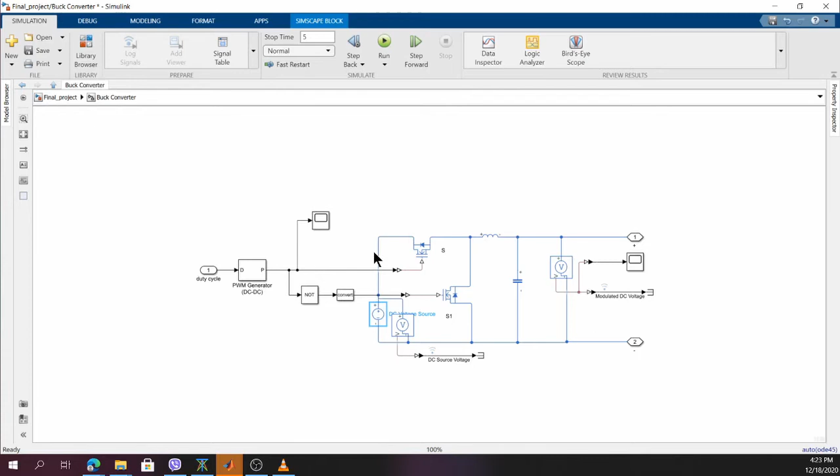This different DC voltage level is then fed to the three-phase converter, and the three-phase converter will work according to this. My name is Rasin Mohammad Ihtemam, ID 1706117.

The three-phase inverter takes DC voltage input from the buck converter and energizes the required phases of the brushless DC motor stator. Which phases to energize, the three-phase inverter takes this command from the commutation logic.

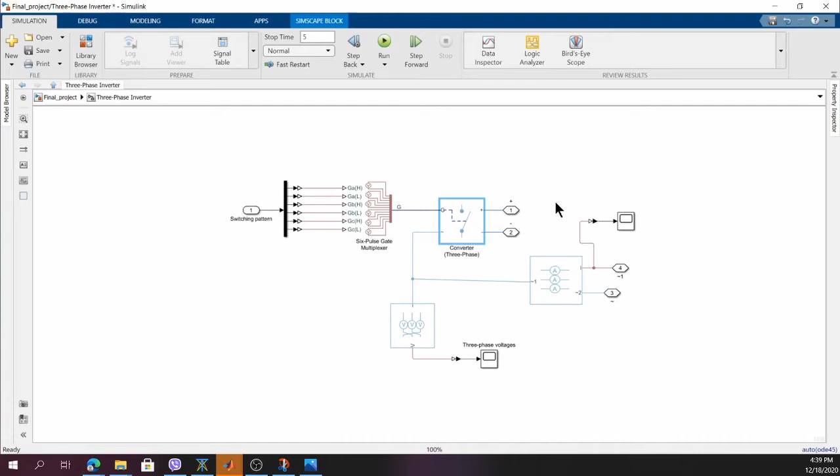In this block we can see that the switching pattern from the commutation logic is fed to the three-phase inverter, and DC supply is fed from the buck converter. Then the three-phase inverter energizes the phases accordingly.

For example, when the rotor of the BLDC is between phases B and C, and the rotor north pole is between phases B and C, the sensor block senses this position of the north pole and gives command to the commutation logic, which gives command to the three-phase inverter, so that the B phase is energized such that there is a north pole, and C phase has a south pole.

The A phase does not have any electrical energy at that moment, and as a result the north pole of the rotor comes close to the C phase. When it crosses over the C phase, the B phase is cut off from the supply by the three-phase inverter, and the inverter energizes A such that there is a magnetic south pole, and C has a magnetic north pole.

For this reason the north pole of the rotor tries to reach the A phase, and thus the three-phase inverter gives DC voltage to the required phases of the three-phase BLDC.

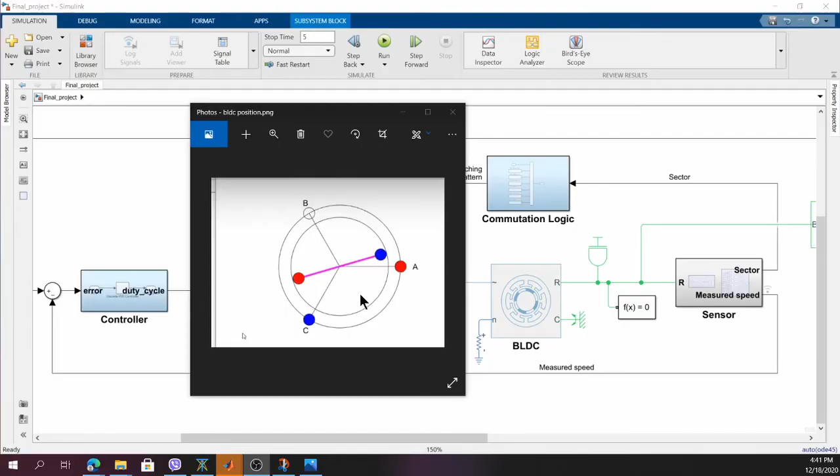There are 6 cases in our commutation logic. Note that each time only one of the outputs will be positive and the rest will be 0. For example, when the rotor is between 0 to 60 degrees, the sensor will command the commutation logic to activate switching pattern 1, and the other patterns will not be activated. In switching pattern 1, only A and C phases will be activated.

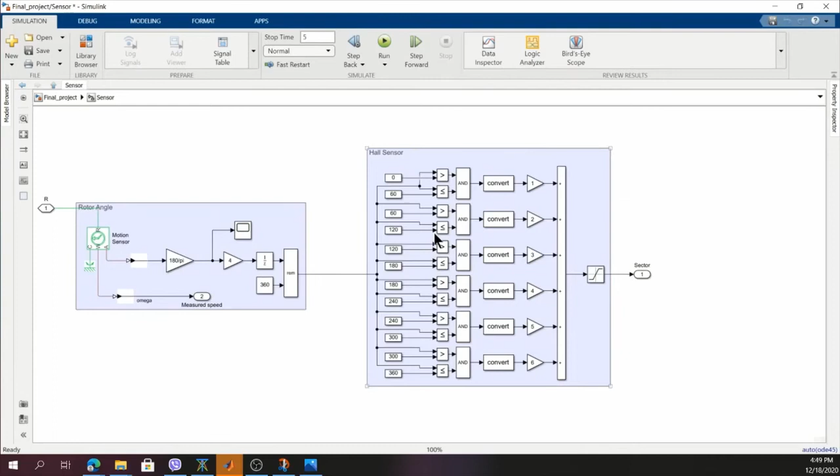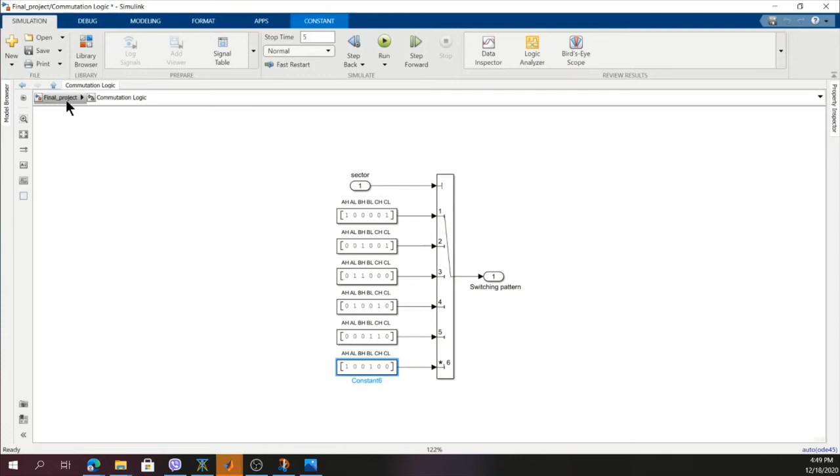When the rotor is between 60 to 120 degrees, the commutation logic will activate pattern 2, and according to our logic, the A phase will be cut off here and the B and C phases will be activated, and vice versa. Thus they work together to give the exact switching pattern or command to the inverter. The sensor here is named the Hall effect sensor.

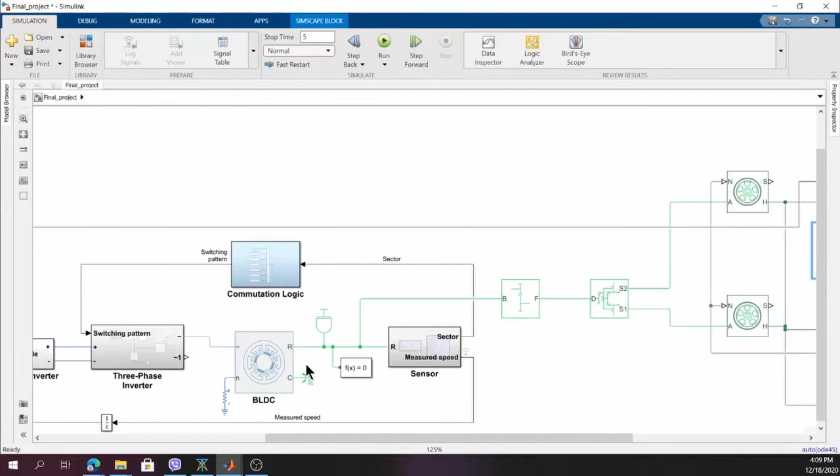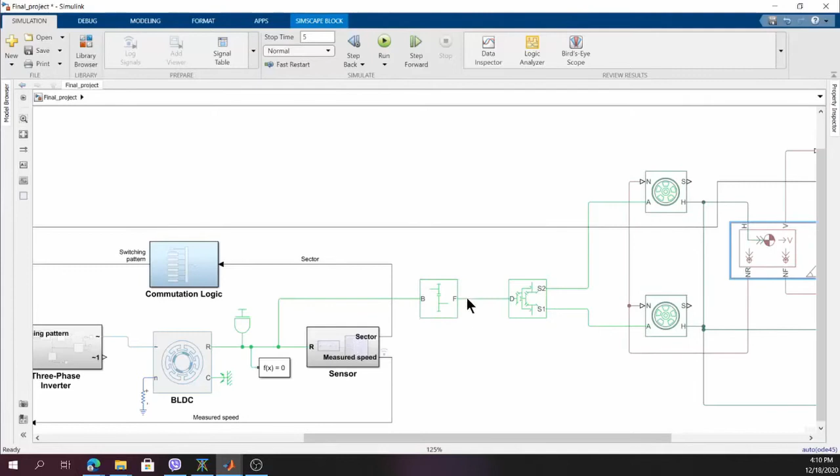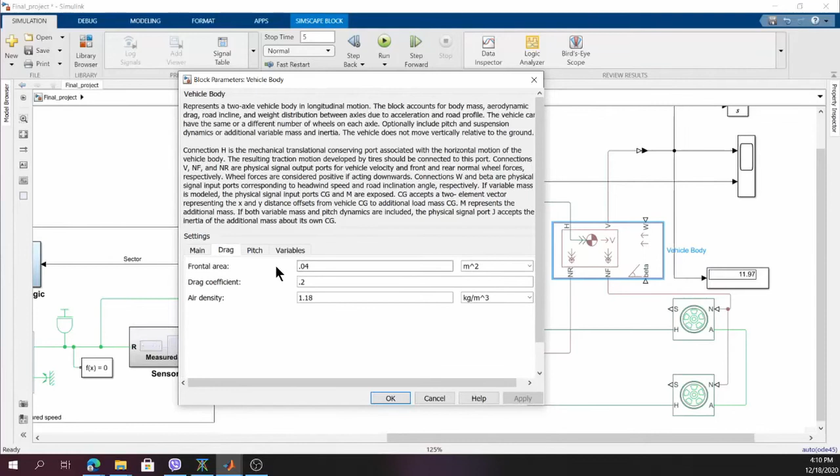Now here is the vehicle body where rear tires and front tires are connected. In the vehicle body we see some different parameters, and we can choose values like mass of the vehicle 30 kg, frontal area 0.04, drag coefficient 0.2, and air density 1.18 kg per meter cube.

On the output side, we can measure the vehicle velocity along with the input velocity that we are controlling, its acceleration and brake, which is simulated by a slider.

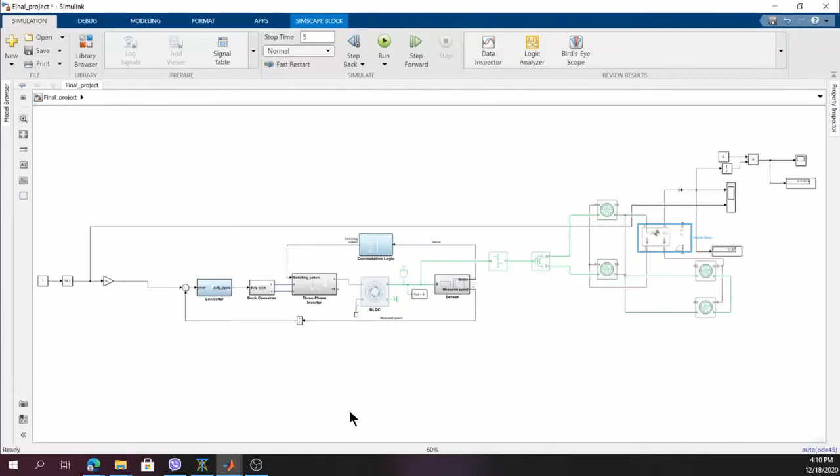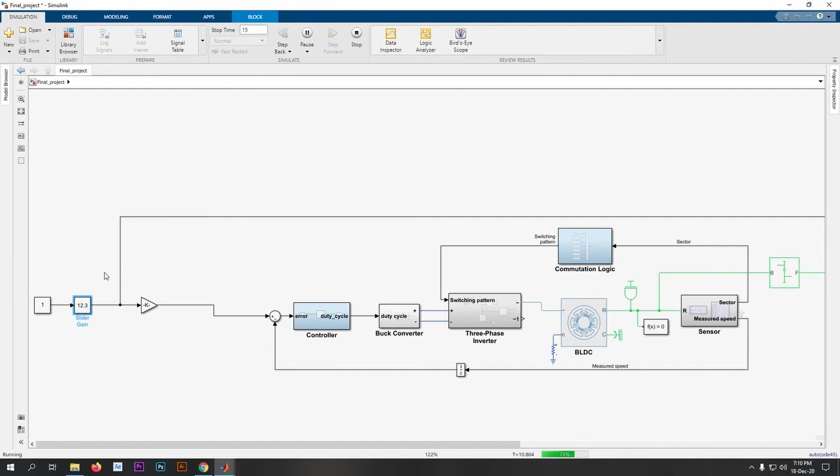Okay, it's time to check the output of our model. Let's just run our model. I'm going to change the acceleration, the input acceleration, in the slider again. It is in kilometer per hour.

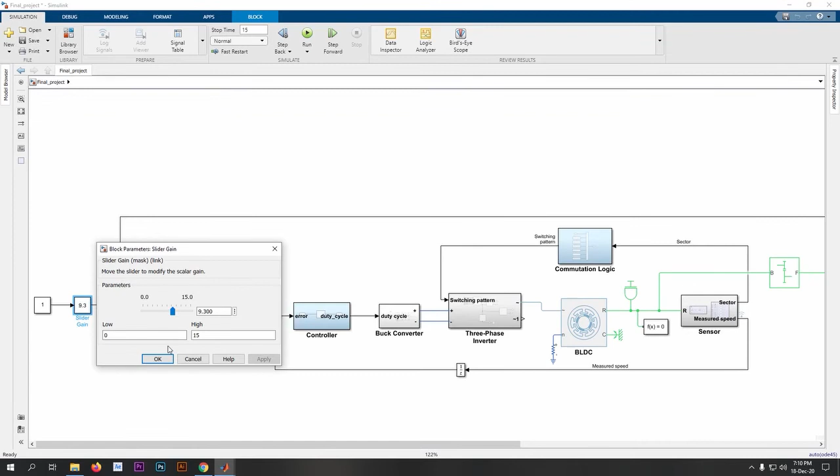So our model ran perfectly. Let's check out the output. There are two graphs: the first one is blue, which is the desired speed, and the second one is yellow, which is the obtained speed of our vehicle.

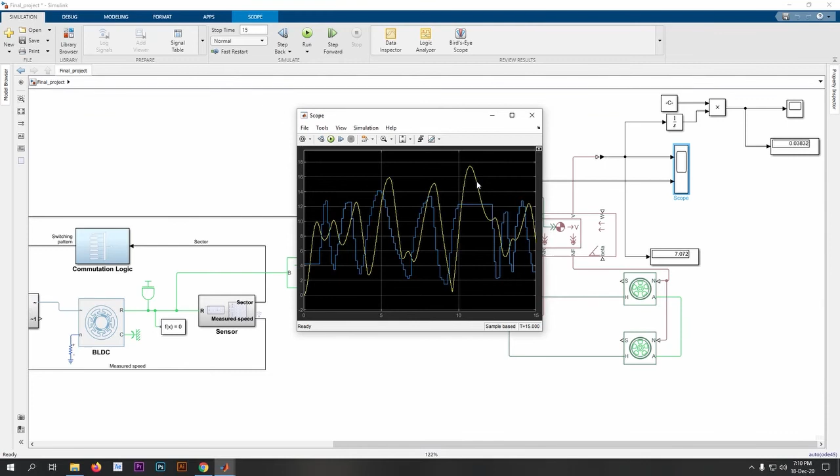Our vehicle tries to match the desired speed, but it didn't follow it perfectly due to inertia and rolling resistance. If we integrate our speed we get the distance, which is nearly 0.036 kilometer. Let's open Data Inspector.

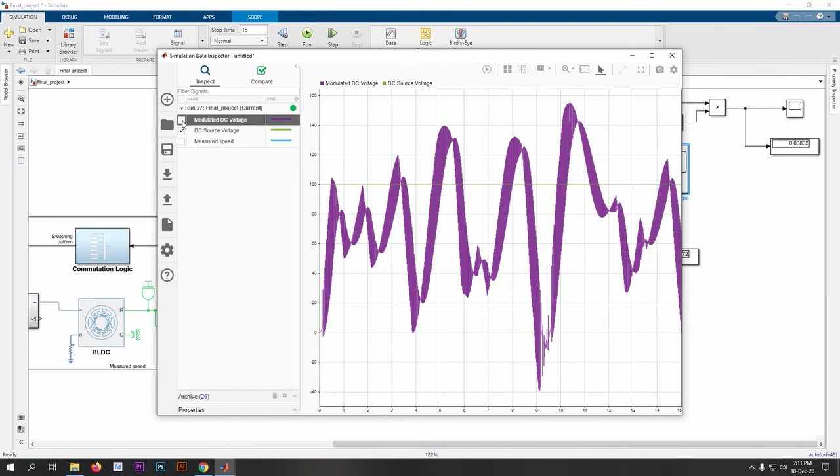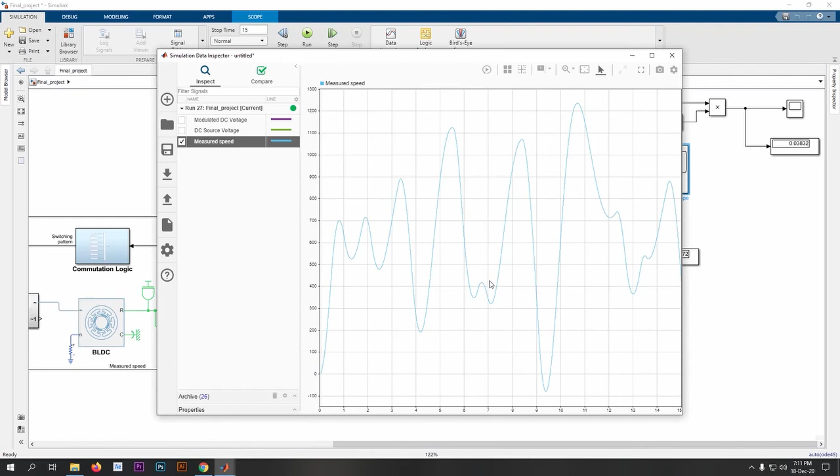First, we can see the DC source voltage, which is here. Our buck converter adjusts the DC source voltage to a modulated DC voltage to get different speeds, and the modulated DC voltage is here. Let's check out the measured speed from our BLDC motor.

If we check out the measured speed, we can see the highest speed is 1200 RPM. So this is the output of our model.

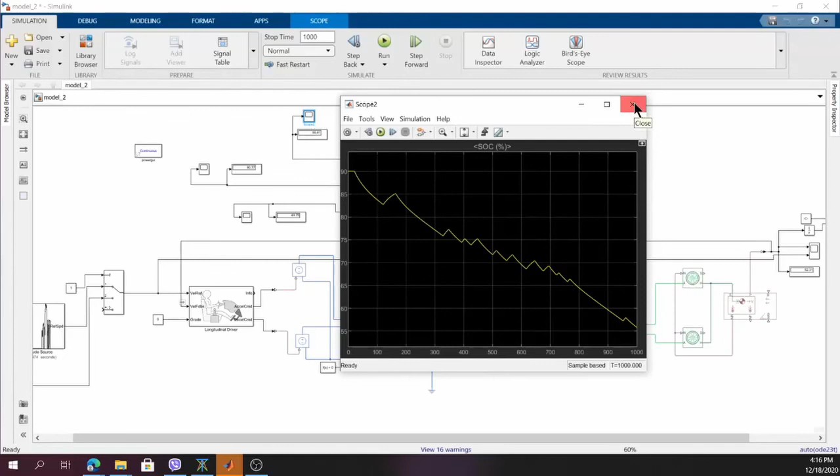This part monitors the charging and discharging of the battery and records it. We can see the battery has discharged from 90% to approximately 55% at the end of the graph, but we can see some spikes here.

It is because of the regenerative brake. When the driver brakes, the motor of the car acts as a generator and produces electricity to recharge the battery.

As an end note, we couldn't connect a single-phase lithium-ion battery to the three-phase stator of the previously mentioned BLDC motor, so that part is absent there. Thank you.